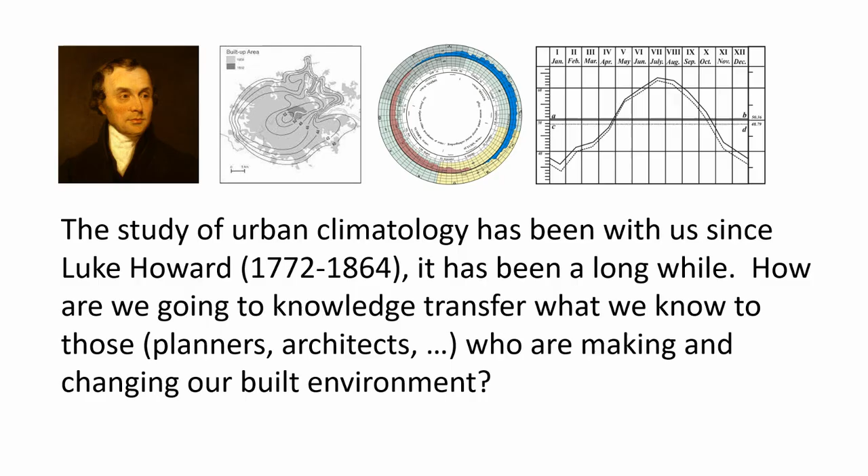Most researchers in the urban climate field know Luke Howard, definitely a famous name in this field. His study on urban climatology, done quite a long time ago, has taught us how to transfer this knowledge to those, especially planners and architects, who are making and changing our built environment.

For implementation studies and applications in Hong Kong, we've been inspired by a paper published almost 20 years ago by Swedish researcher Professor Eliasson. He did a survey to understand why there is very limited application of urban climate knowledge in urban planning. In his study, he identified the problems, summarized explanatory variables, and concluded four key points: develop tools suitable for urban planners, improve awareness of urban climate, improve communication and argumentation, and improve institutional capacity.

Based on our own experience with these kinds of collaborations and implementations, we think the most important part is improving communication between climatologists and architects and designers. You have to convince them in their language.

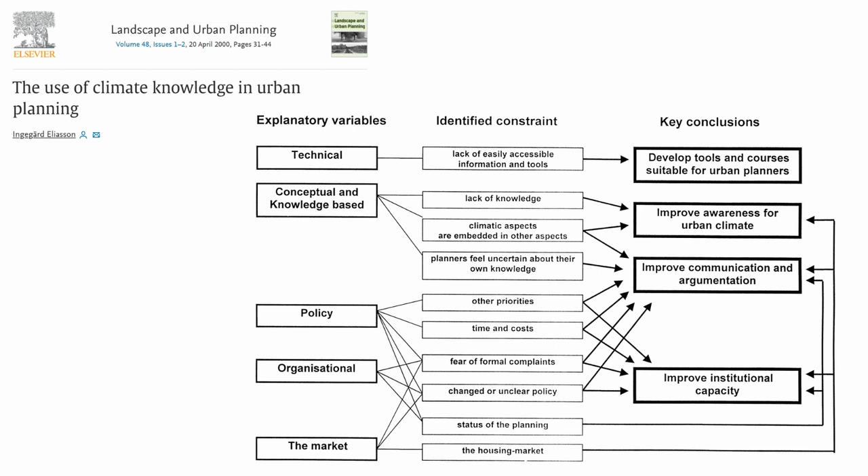That's why Professor Edward Ng published a paper in the International Journal of Climatology summarizing his experience and practical understanding of the need for meteorological and climate information in the design of high density cities. One key message is to keep everything simple, because simplicity is key, and you don't want to confuse your partner—the designers, architects, or even the general public. When you communicate with them, a simple message is key.

For example, when we talk about the wind environment, instead of using wind rose diagrams or simulation results, we use a big arrow. In the Sweden case, they also use a big arrow to show prevailing wind directions. We adopted a similar method in Hong Kong—this wind information map we generated for the Planning Department of the Hong Kong government. Now planners, designers, and even government officials refer to these big arrows and wind zonings because this is their language. We need to put evaluation results into graphics and visualize these evaluations.

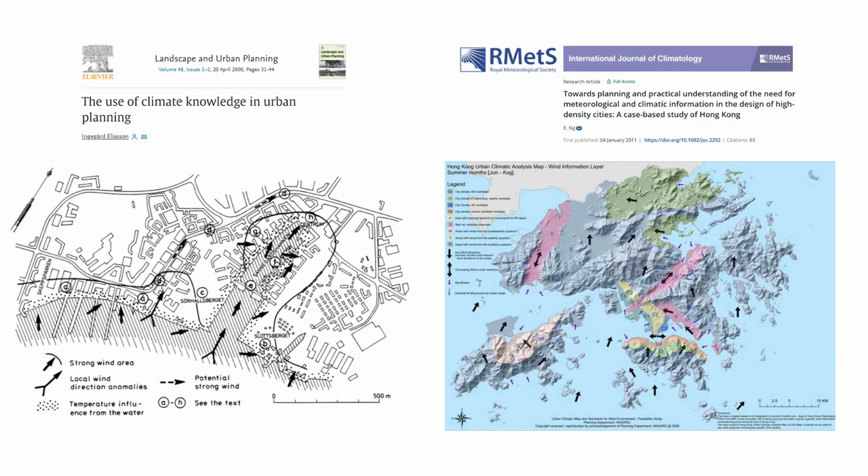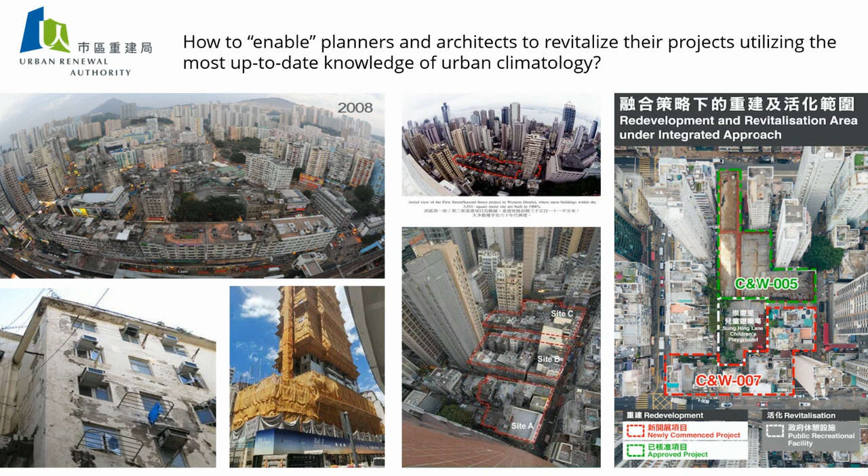In the real case of Hong Kong, we're not only a well-developed city, but also an aged city. Aged city means one-third of areas have this kind of aged buildings, and several districts are facing urban renewal exercises. So how do we enable planners and architects to revitalize their projects utilizing the most up-to-date knowledge of urban climatology? This is the challenge of how we implement this information in planning and design.

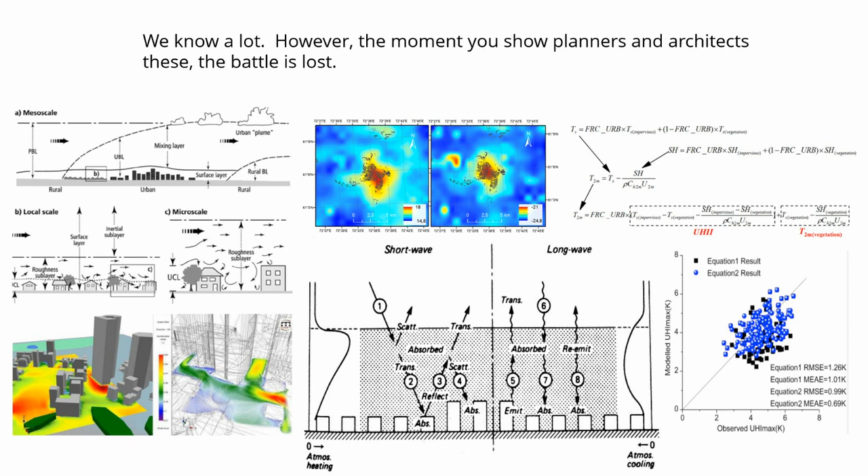At the beginning, we know scientists and climatologists have done a lot. However, the moment you show planners and architects this information in its raw form, the battle is lost, because you need to keep everything in simple language, or even more so, in their own language. When they talk about design and planning projects, they use graphics.

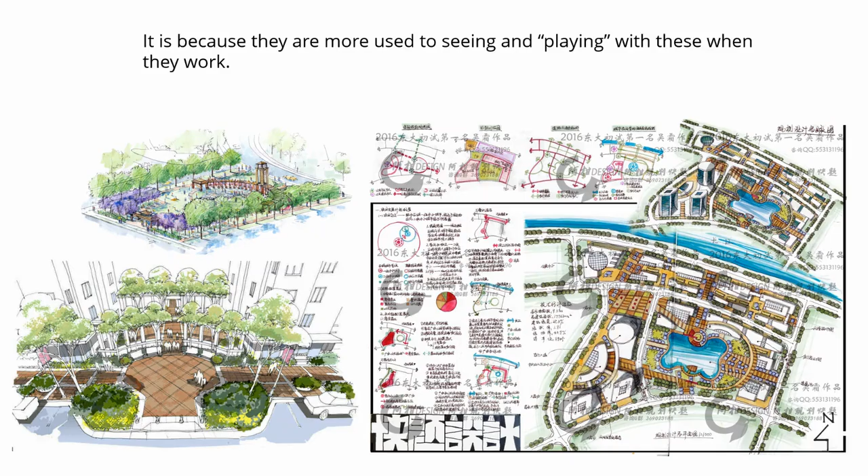Climatologists and scientists may ask, what can be done? Going back to the previous paper, we need to improve communication and argumentation and try to understand their language. For architects and designers, this is like a journal paper published in architectural design journals—graphics and plans are their tools. That's why we need to show case studies, precedent cases, and good lessons learned from other cities.

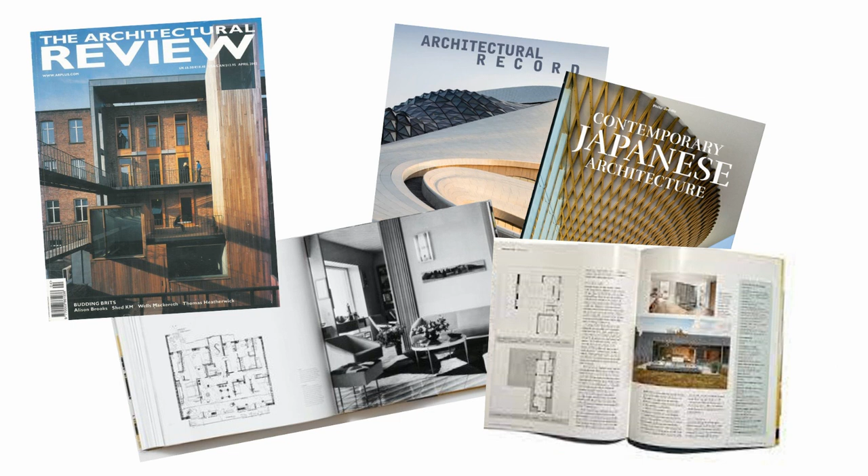For example, like the previous speakers mentioned, using real cases is an effective way to convince them.

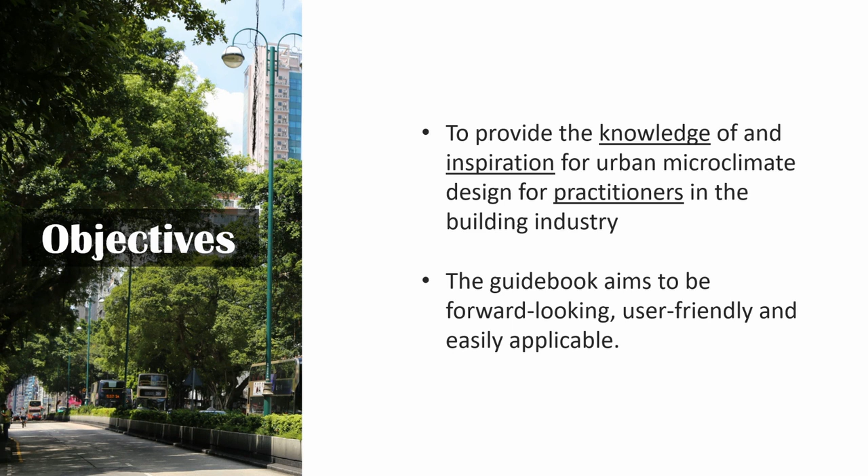In Hong Kong, we collaborated with the Hong Kong Green Building Council, which is like the organization in the US that provides green building assessments like LEED AP and LEED certifications. We worked with them to generate a guidebook that can be used and adopted by planners and designers. At the beginning, we wanted to provide general, user-friendly knowledge to inspire them about urban climate, microclimate, and changing climate. That's why the book is forward-looking, user-friendly, and easily applicable.

The guidebook includes 5 parts. The introduction provides general education about climate knowledge and climate change information. The second part covers guidelines for urban microclimate design, based on Hong Kong local good practice, where we summarize 31 design actions that practitioners can use in their daily jobs.

The third part covers subtropical urban microclimate design, showing good designs from other cities like Brisbane, Singapore, and Macau, because good examples and case studies are very important for practitioners to learn from.

The fourth chapter talks about good practice, looking at winning projects by the Hong Kong Green Building Council to identify common good practices and what can be done in Hong Kong. We made a summary of that.

The fifth chapter talks about the way forward and what can be done in the future. At the beginning, we show the scientific background, key ideas, and why climate change matters to designers and architects, and we also educate them about outdoor thermal comfort.

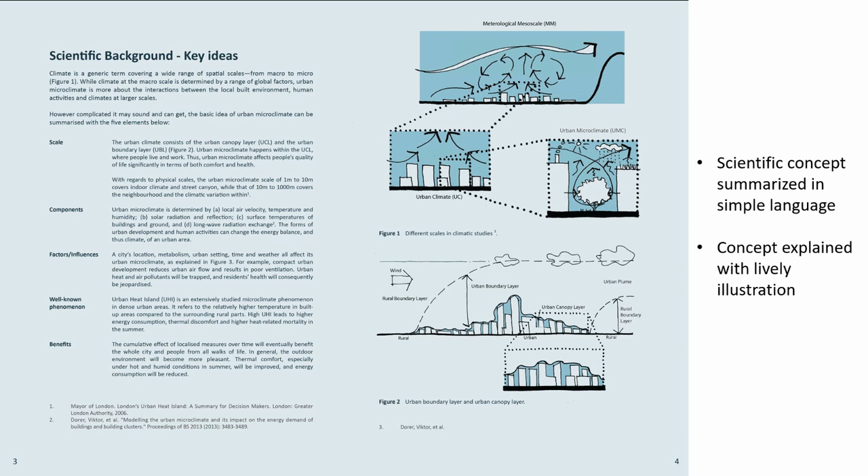We also link this to the Hong Kong context, so you can see the scientific concepts summarized in simple language, and even explained with lively illustrations and graphics.

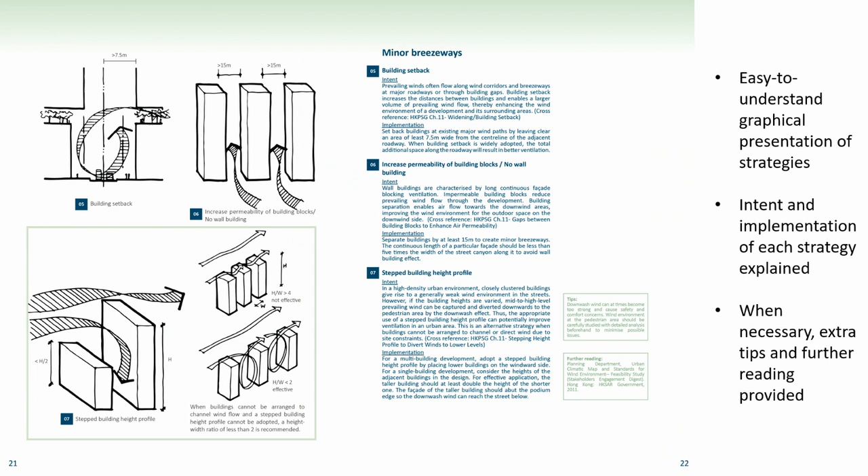For the strategies, we focus on 4 aspects: wind, temperature, thermal radiation, and precipitation. For each action, we use graphics to show how it influences design and what makes a good design, all illustrated in an easy-to-understand graphic presentation of the strategies.

More importantly, since we work with industry people, we need to understand the implementation process. A design or construction project usually has 4 stages: conceptual design, schematic design, detailed design, and tender and construction.

We realized that if we want to influence them and implement good urban climate understanding into design, we have to do this even before their design starts, meaning we need to convince them as early as possible. Otherwise, if you miss the right time to implement this, then you cannot implement it at all.

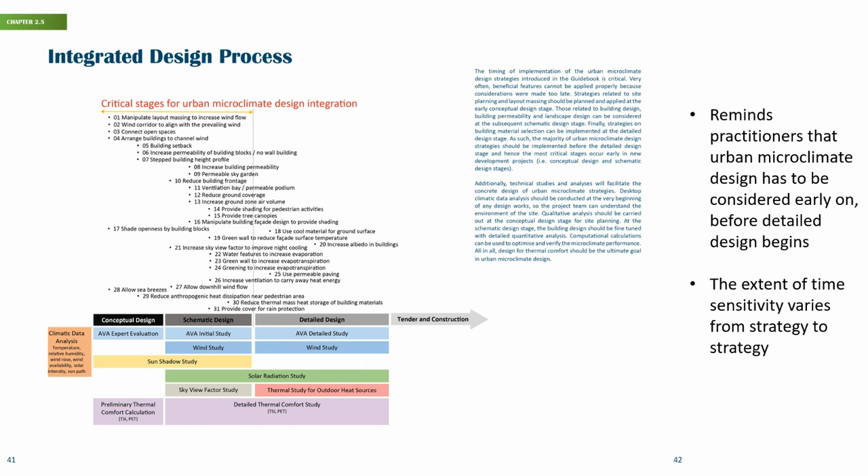That's why when we summarized our 31 mitigation and action design strategies, we mapped them out together with the design process, as shown in this figure.

Also, since the Hong Kong Green Building Council handles the green building assessment, we needed to link this together with the existing BEAM Plus green building assessment system, to see what opportunities exist to implement this into local practice, and to understand what has already been done by this system.

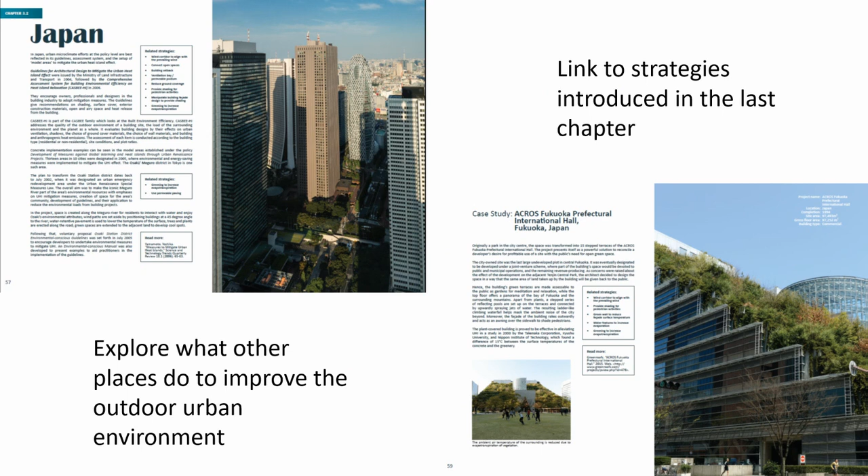We also learned from Singapore, Japan, Brisbane, Australia, and Macau, so we could show our local practitioners what good design practice has been done worldwide.

For chapter 4, this is very important because very often when we talk to clients, architects, and designers, they ask questions like: this is my site, we have this kind of density situation, we have this kind of site context situation, how can I implement this into our building design, into our site design?

So when we did this study, we summarized the awarded projects and classified them by site context and density context. You can see the projects mapped out here: some located in high density, compact sites, and some located on large sites but with low density.

So when we review their cases, we also ask the following questions: Where is the project site? What are the key microclimate features they are considering, and why is it important for the microclimate there? How were the microclimate conditions studied and improved? When were the microclimate conditions and potential strategies taken into account in the process? What are the expected achievements?

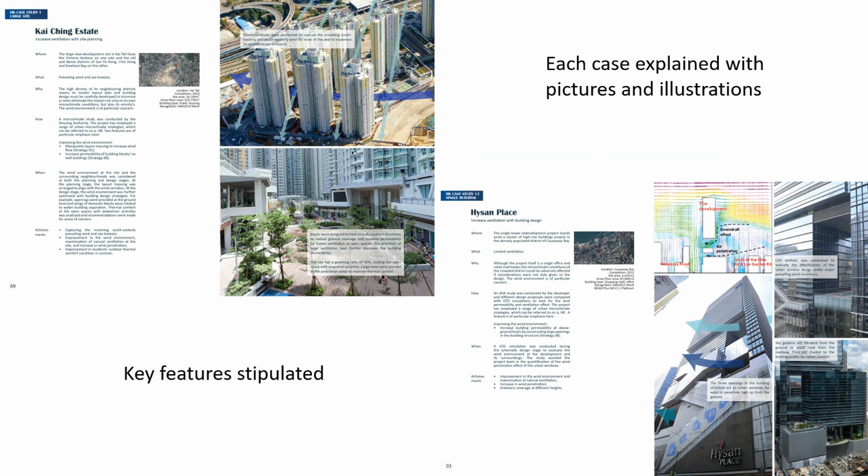So, for example, this is a case from Hong Kong Public Housing Authority. In Hong Kong, over 40% of the population live in public housing estates. This is one new development project from the Public Housing Authority. In this project, they show that they are welcoming incoming prevailing wind directions, and also at the lower level, they create ground level greenery and more open space for pedestrians. For each case, we try to summarize the good lessons and understand the strengths at the site level and how they create a successful story.

And for the 5th chapter, we talk about the way forward, summarizing science, technology, and development. For example, what past efforts have been acknowledged, and what kind of continuous support for research is needed. Also, like the previous speaker mentioned, adequate funding is definitely needed and required. And then we also summarize the way forward for policy, practice, and design, and concerted effort from the government is important.

I think not only in several cities in Australia, but even in mainland China. Recently I got a public document mentioning that China is trying to implement more effort for climate change adaptation pilot studies. In the previous round it was only 32 cities, but now over 100 cities will do similar work—climate change adaptation is definitely necessary and timely needed.

So apart from that, we also know that public awareness and education is extremely important. When we talk about adaptation resilience, we not only look for resource support from the government—everyone matters. As individuals, we have to look after ourselves very well. And if you're interested in this microclimate book, you can scan the QR code. It's available online and everything is published in English. Thank you very much for your attention.